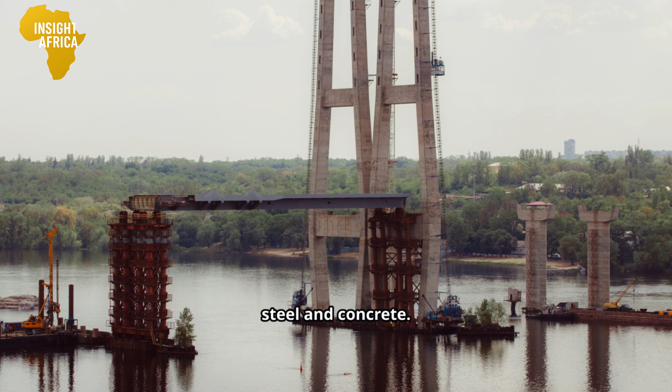This is not a story about charity. It is a chronicle of will, a testament to a nation that looked at the vast, shimmering expanse of Lake Victoria and saw not an obstacle, but an opportunity—an opportunity to connect its people, to fuel its economy, and to declare its independence in a language the world could not ignore: the language of steel and concrete. This is the story of a bridge, but it is also the story of a dream forged in the heart of Africa, for the people of Africa, by the people of Africa.

Imagine a sunrise. The first light of dawn spills across the horizon, painting the sky in hues of orange and gold. Below, the second largest freshwater lake on the planet sleeps, its surface a mirror reflecting the heavens. And stretching across this immense body of water, a new silhouette cuts through the morning mist. It is a structure of immense scale and profound significance.

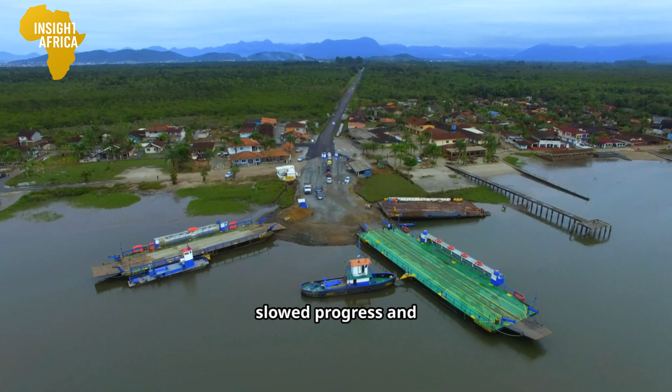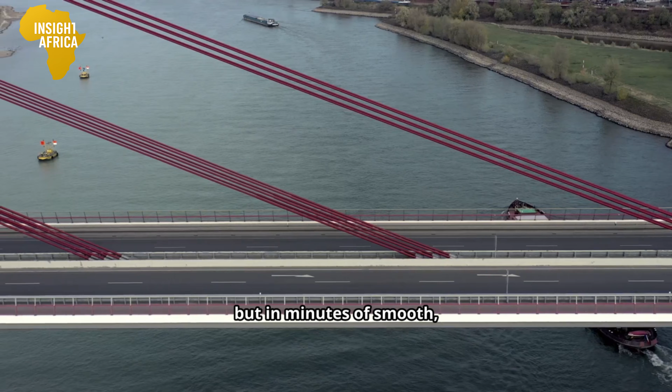For decades, the crossing was a challenge, a bottleneck that slowed progress and separated communities. Ferries, old and unreliable, were the only link. But a new era was dawning, one where the journey would be measured not in hours of waiting, but in minutes of smooth, uninterrupted travel, a testament to a nation's resolve.

This is the Lake Victoria Bridge. More than just an engineering marvel, it is a symbol. It represents a fundamental shift in the narrative of African development, framed by external forces: conditions of international lenders, the agendas of foreign powers, the narratives of dependency.

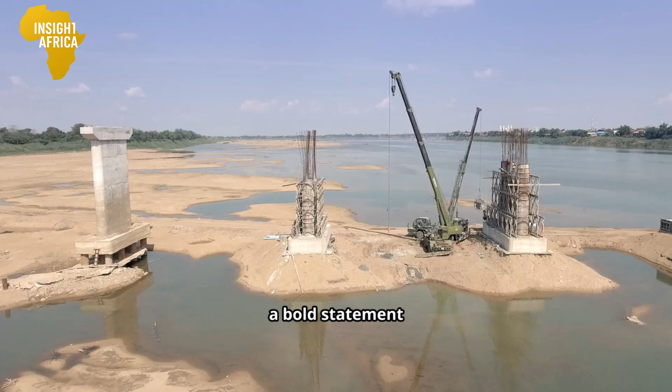Tanzania chose a different path. It looked inward, not outward. It gathered its own resources, marshaled its own expertise, and trusted in its own vision. The result is a structure that stands not as a monument to foreign aid, but as a towering declaration of self-reliance, a bold statement that the future of Africa will be built by African hands.

The world was watching, but perhaps it wasn't paying close enough attention. The financial gatekeepers, the institutions that have long dictated the terms of progress in the global south, were bypassed—the International Monetary Fund, the World Bank. This project was born from the collective will of the Tanzanian people, funded by their own treasury.

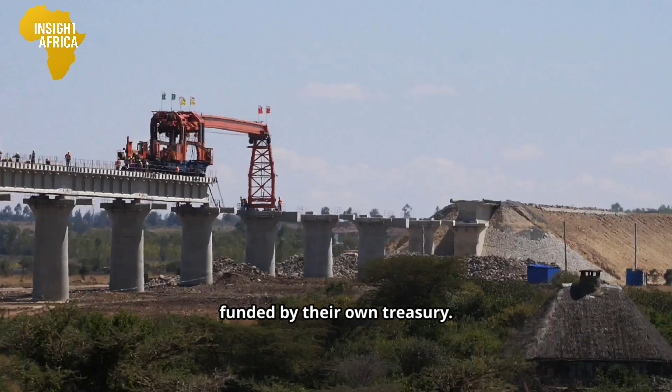It was a quiet revolution, a bold act of economic sovereignty that sent ripples through the halls of global finance. It proved that a nation, armed with vision and discipline, could achieve the monumental without begging for permission, rewriting the rules of what was considered possible for an African nation to accomplish on its own terms.

In the lexicon of global development, certain words are repeated like a mantra: debt, aid, dependency, conditions. These are the chains, both visible and invisible, that have often shackled the ambitions of nations striving for true independence. The story of the Lake Victoria Bridge is the story of breaking those chains. It is an unapologetic display of a country taking control of its own destiny.

When the decision was made to fund this colossal $300 million project entirely from domestic resources, it was more than a financial strategy. It was a political and philosophical statement. It was Tanzania announcing to the world that its future would not be mortgaged, its policies would not be dictated, and its progress would not be contingent on outside approval.

This project is a masterclass in Pan-African excellence, a beacon of what is possible when a nation harnesses its pride and channels it into progress.

The bridge is not just a physical connection between the city of Mwanza and its surrounding regions. It is a spiritual connection to the ideals of sovereignty and self-determination championed by the forefathers of African independence. It embodies the spirit of Julius Nyerere's Ujamaa, updated for the 21st century, a vision of familyhood and self-reliance, now expressed in the language of world-class infrastructure.

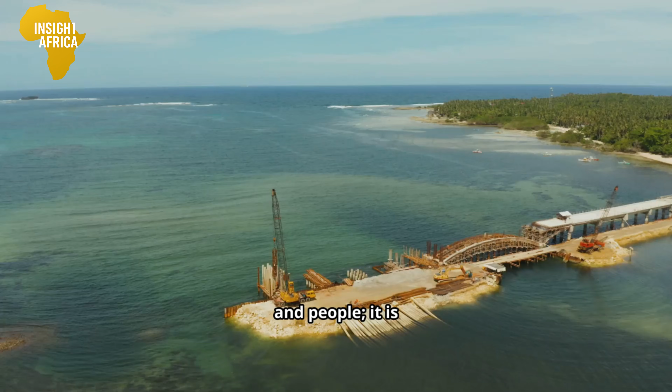This is not just about moving goods and people, it is about moving a nation forward, propelled by its own engine of ambition and pride.

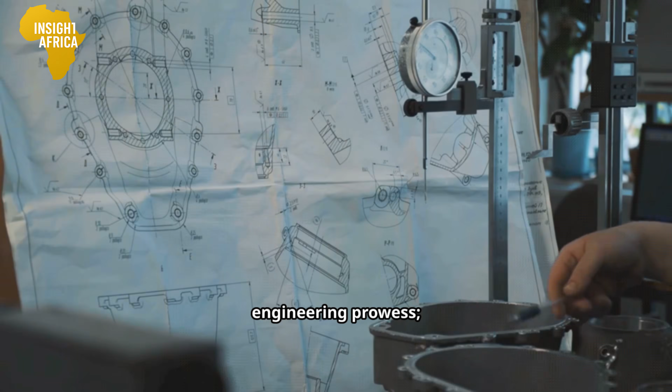Consider the sheer audacity of the vision, to look upon the vast expanse of Lake Victoria and decide not just to cross it, but to do so with a structure that would become the longest of its kind in East and Central Africa. This required more than just engineering prowess. It required a deep-seated belief in one's own capabilities.

It was a challenge to the prevailing narrative of African limitations, a direct refutation of the idea that mega-projects on this scale were the exclusive domain of wealthier, more developed nations. Tanzania dared to dream on a continental scale, and in doing so, laid down a blueprint for its neighbors to follow, a path paved with national pride and unwavering resolve.

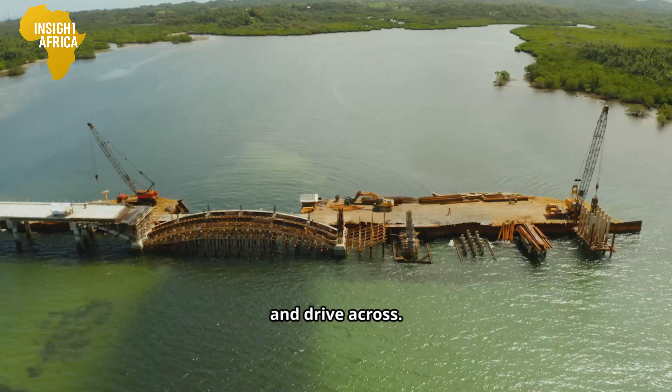The bridge stands as a physical manifestation of a new African consciousness. It is a symbol that resonates far beyond the borders of Tanzania, speaking to a continent on the rise. It is sovereignty you can see, touch, and drive across. Every girder, every pillar, every inch of asphalt is infused with the spirit of a people who chose to build their own future rather than wait for it to be given to them.

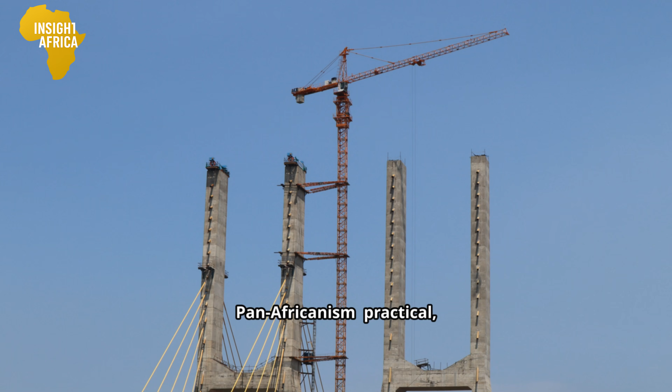This is the essence of the new Pan-Africanism: practical, bold, and utterly unapologetic. It is the understanding that true liberation is not merely political, but economic and psychological, and it is achieved one monumental, self-funded project at a time for all the world to see.

June 19th, 2025. This date is not just a mark on a calendar, it is etched into the soul of a nation. On this day, a river of humanity flows toward the shores of Lake Victoria. They come from every corner of Tanzania, from the bustling streets of Dar es Salaam to the quiet villages of the Serengeti. They are farmers, merchants, students, elders, their faces alight with a shared sense of anticipation.

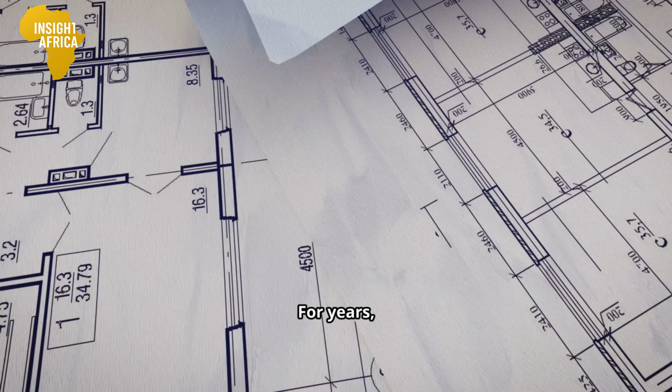The air crackles with an electric energy, a mixture of joy, pride, and disbelief. For years, the bridge was a distant promise whispered on the wind. Now it stands before them, a magnificent reality of steel and stone, a titan of progress gleaming under the African sun. This is more than a ceremony, it is a national pilgrimage.

Thousands upon thousands gather, a vibrant mosaic of color and celebration. The sound is a symphony, the rhythmic pulse of drums, the soaring melodies of triumphant songs, the constant joyful hum of voices sharing stories. Flags, brilliant green, yellow, black, blue, wave like a forest in the wind.

For so long, the lake was a divider, a vast expanse of water that dictated the pace of life and commerce. Today, it is the backdrop for a moment of ultimate connection, a celebration of a promise kept, a monumental task completed, a day when the impossible became tangible.

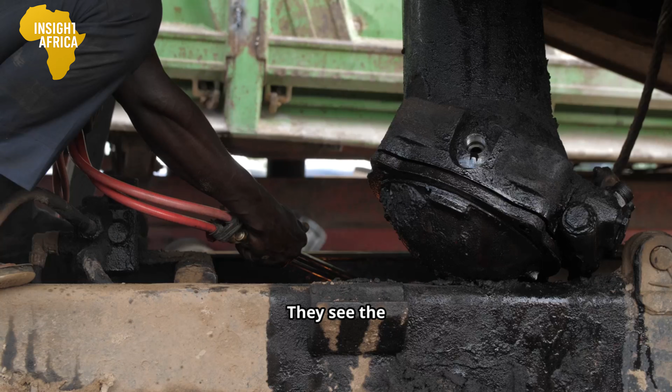They look up in awe at the colossal structure that now commands the horizon. It is a testament to years of tireless labor, a monument built not by foreign hands, but by their own brothers and sisters. They see the engineers who designed it, the welders who fused its steel heart, the construction workers who braved the elements day and night to bring this vision to life.

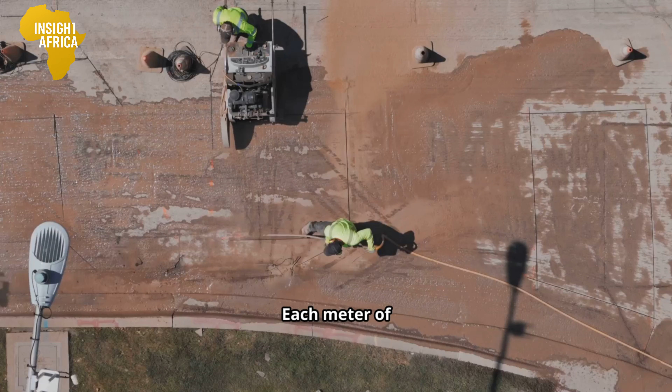Each pillar rising from the depths of the lake is a symbol of resilience. Each meter of asphalt is a paving stone on the road to a new era of prosperity. This is the moment when a nation collectively exhales, releasing the breath it has held, and inhales the sweet air of achievement.

The world's cameras are here, of course. International news crews, financial analysts, political observers have all descended upon Mwanza. They came expecting to report on a story of African infrastructure, but they found something far more profound. They found a story of sovereignty in action.

They witnessed a nation not just opening a bridge, but opening a new chapter in its history, written in its own language, funded by its own wealth, and dedicated to its own people. This was not just an inauguration, it was a coronation of a new kind of power, the power of self-belief.

As the official proceedings begin, a hush falls over the immense crowd. The moment is saturated with historical weight. You can feel it in the stillness of the air.

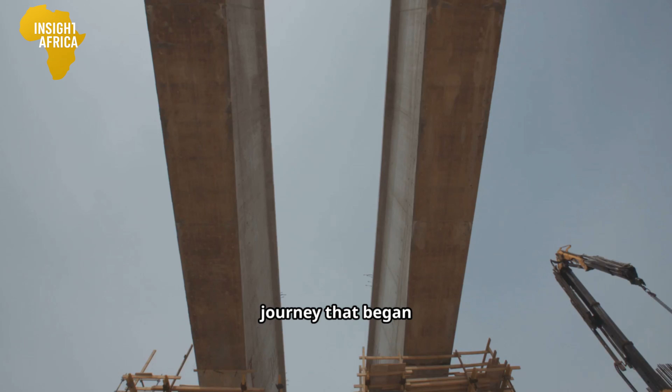This is the culmination of a journey that began not with the first pour of concrete, but with a decision made in the highest halls of power. A decision to trust in Tanzania itself. It was a gamble, a defiant choice to sidestep the well-trodden path of international loans and the conditions they inevitably carry. It was a declaration that the nation's destiny was its own to forge.

And as leaders speak, their words are not just for the cameras or the dignitaries. They are for every citizen who contributed, through their taxes and their faith, to this shared triumph.

The bridge is more than a link between two points of land. It is a bond that strengthens the very fabric of the nation. It connects the economic powerhouse of Mwanza, the rock city, to the vital agricultural lands and trade routes that lie beyond. But the connection is deeper than commerce.

It is a psychological bridge, uniting a people in a common sense of purpose and achievement. For generations, communities felt the distance imposed by the lake. Now, that distance has been conquered. A journey that once took hours of uncertainty by ferry is now a smooth, reliable passage of mere minutes, woven into the daily rhythm of life, a constant reminder of what they built together.

Imagine the first vehicles to officially cross. Not a motorcade of politicians, but a convoy representing the lifeblood of the nation. A bus filled with schoolchildren, their faces pressed against the windows. A truck laden with fresh produce. An ambulance, representing the promise of faster access to healthcare. Each vehicle is a story, a testament to the bridge's immediate and profound impact on the lives of ordinary Tanzanians, a rolling tribute to their collective effort.

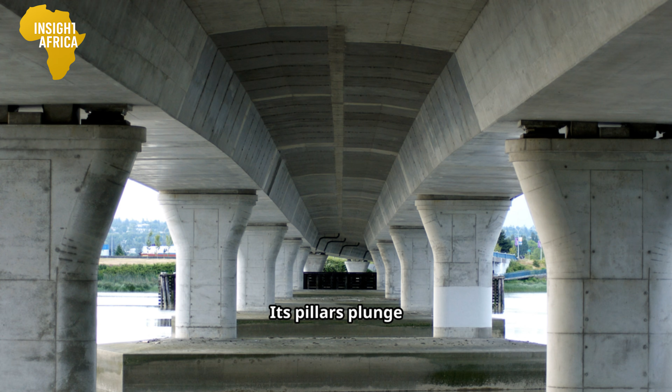Think of that distance. For 3,200 meters, this titan strides across the water. Its pillars plunge deep into the lakebed. Its deck soars high above the waves. A colossal artery designed to carry the lifeblood of a nation.

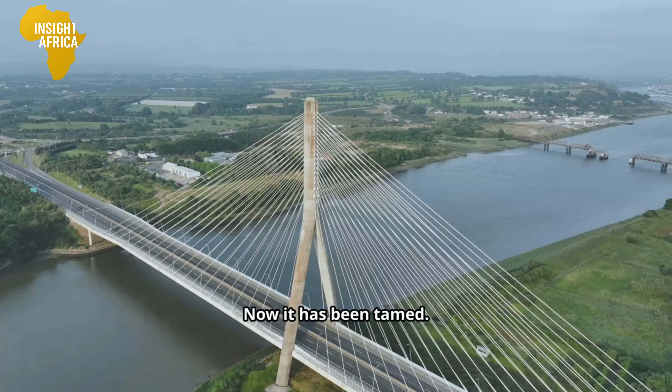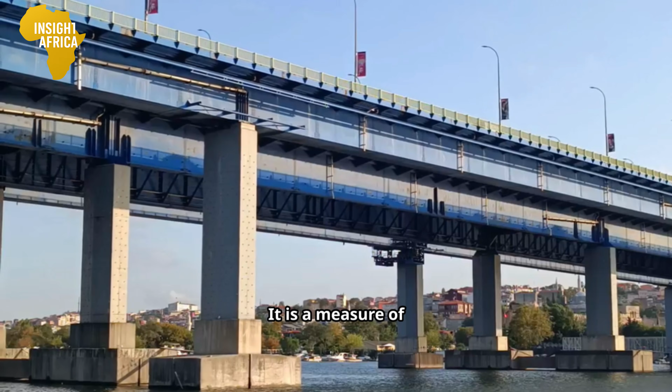Before it existed, this expanse was a formidable barrier. Now it has been tamed, not by an outside power, but by the sheer will and ingenuity of Tanzanian minds and hands. This structure is a physical manifestation of national ambition, a line drawn across the map that redefines connectivity. Its length is not just a statistic, it is a measure of newfound confidence, a symbol of the capacity to think big and to build even bigger.

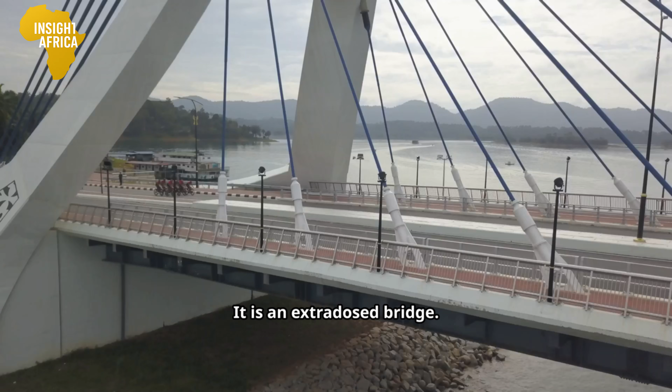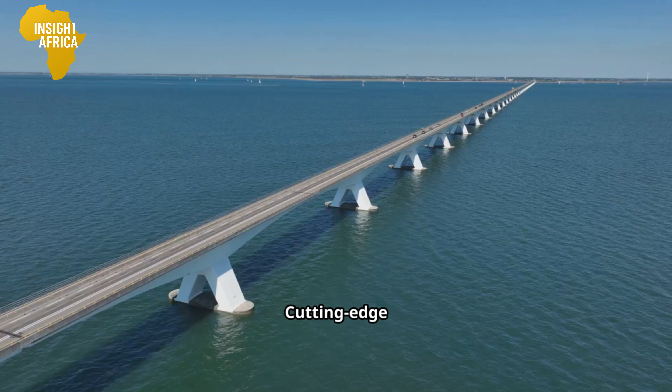The design is a marvel of modern engineering, a fusion of strength and grace. It is an extradosed bridge, a sophisticated hybrid that combines the principles of a girder bridge with the elegance of a cable-stayed design. The choice was deliberate. Cutting-edge technology that ensures aesthetic beauty, long-term durability, built to withstand the lake's unique conditions for a century or more.

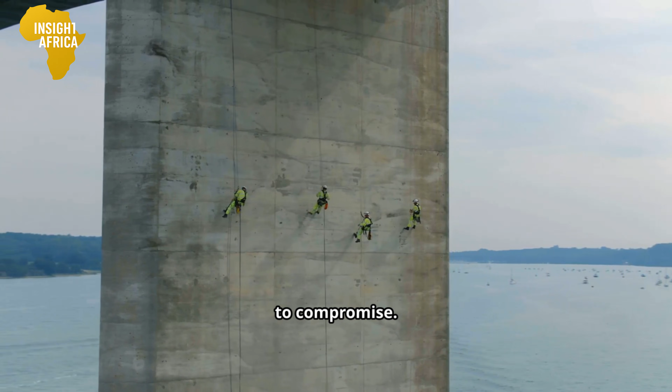Every cable, every segment of pre-stressed concrete, speaks to technical excellence rivaling projects across the globe. This is not just infrastructure, it is artistry on a monumental scale, a testament to a commitment to quality that refuses to compromise. This is the new titan of the African continent.

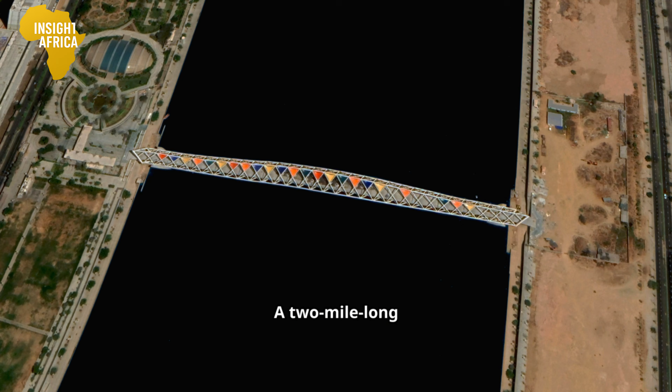Its shadow falls long across the water, a constant, powerful reminder of the day Tanzania solved its own problems with its own vision. It stands as a silent rebuke to the quiet condescension of the old world order, a 2-mile-long rebuttal to any narrative of limitation.

A landmark for Tanzania, for all of Africa. A beacon proving that when it comes to building the future, the continent's ambition knows no bounds. Its reach extends as far as its vision dares.

The significance of the bridge extends far beyond its record-breaking length. It is a strategic masterpiece, a lifeline meticulously planned to unlock the economic potential of an entire region. For decades, Mwanza, a critical hub on the southern shore of Lake Victoria, was functionally an island. Ground transport to the north was effectively severed. The only options were slow, often unreliable ferries, or a punishing circuitous road journey that added hundreds of kilometers and countless hours.

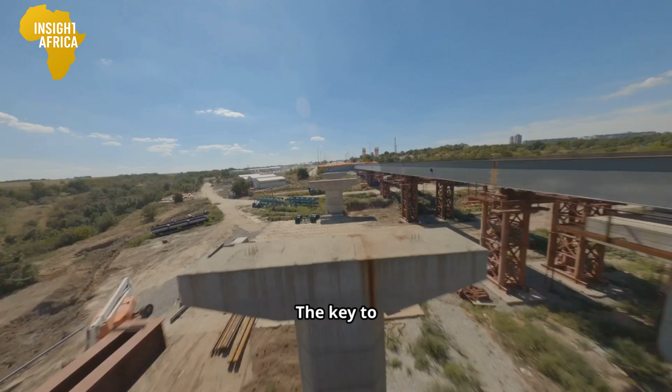The bottleneck choked commerce. It stifled growth. It isolated communities. The bridge was not just a convenience, it was a strategic necessity. The key to unleashing a torrent of economic activity held back for generations. This structure is the heart of a new circulatory system.

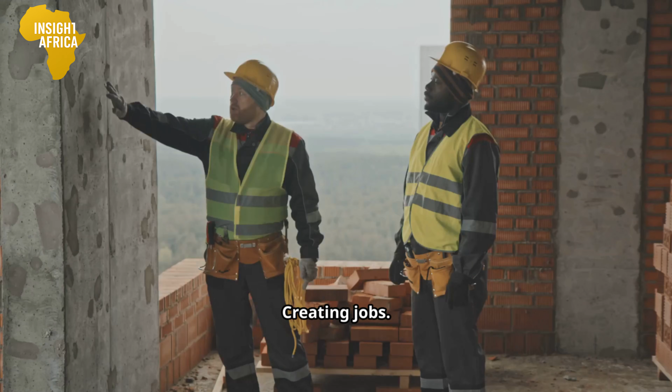It connects Mwanza directly to neighboring regions, Geita, Kagera, and to landlocked nations, Rwanda, Burundi, Uganda. Suddenly, goods flow in a smooth, uninterrupted stream. Farmers in fertile northern lands can get produce to Mwanza markets in a fraction of the time, reducing spoilage, increasing profits. Minerals from resource-rich Geita move more efficiently, fueling the national economy. This isn't just about moving trucks faster, it's about accelerating progress for millions, creating jobs, building prosperity from the ground up.

Imagine the daily dance of commerce across its 2-mile span. Trucks laden with cotton, trucks laden with coffee, once delayed at ferries, now glide toward ports and processing plants. Buses carrying traders, buses carrying workers, connecting urban centers with rural communities, fostering integration and opportunity.

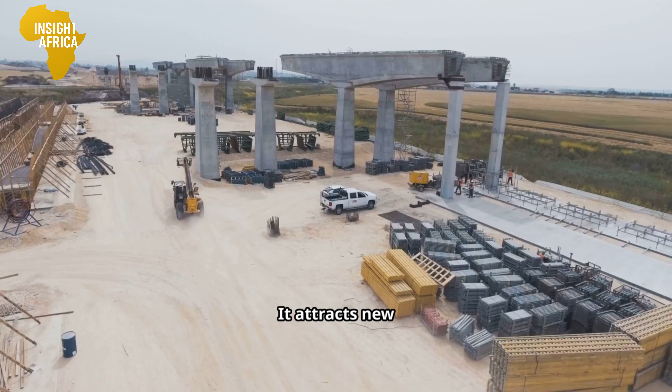The bridge is a powerful economic engine. Its constant hum is the sound of a region awakening. It reduces transportation costs, it increases trade efficiency, it attracts new investment to previously remote areas, a catalyst for a chain reaction of development. Every vehicle contributes to a stronger, more resilient national economy.

More than an engineering feat, it's a tool of empowerment. It empowers the farmer, the miner, the small business owner, the student. It gives them back the most precious resource: time. Hours once lost to waiting are now hours for production, for education, for family.

In building this bridge, Tanzania did more than join two pieces of land. It connected its people to opportunity. It bridged the gap between potential and reality. This 3.2-kilometer structure is a testament: true development isn't measured in dollars loaned, it's measured in lives transformed by sovereign ambition.

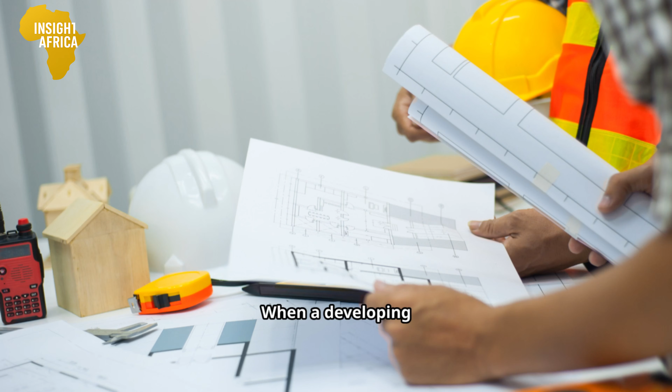In the grand theater of global finance, there is a script that has been followed for decades. When a developing nation dreams of a project this grand, this audacious, the first act always begins with a pilgrimage, a journey cap in hand to the grand halls of the World Bank, to the International Monetary Fund in Washington, D.C. It is a well-trodden path, paved with loan applications, structural adjustment policies, conditionalities that often reach deep into the sovereign affairs of a nation. This is the established order.

But Tanzania, with a quiet and steely resolve, chose to tear up that script. They decided the first act would not be a plea for help, but a declaration of self-reliance. When plans for the Lake Victoria Bridge were finalized, the world's financial institutions waited for the inevitable phone call. The call never came. Instead, Tanzania announced it would finance the entire $300 million cost internally, paid for by the Tanzanian people, through their own national treasury, from their own revenues.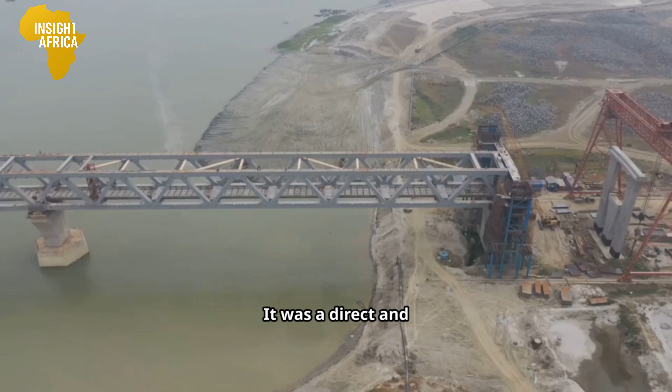This was not just a funding decision, it was a political earthquake. It was a direct and unapologetic challenge to the decades-old paradigm that Africa's progress must be underwritten by foreign capital and subject to foreign oversight. This singular act of financial sovereignty cannot be overstated.

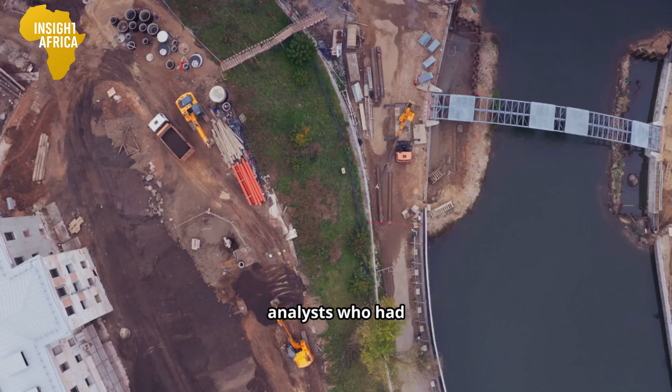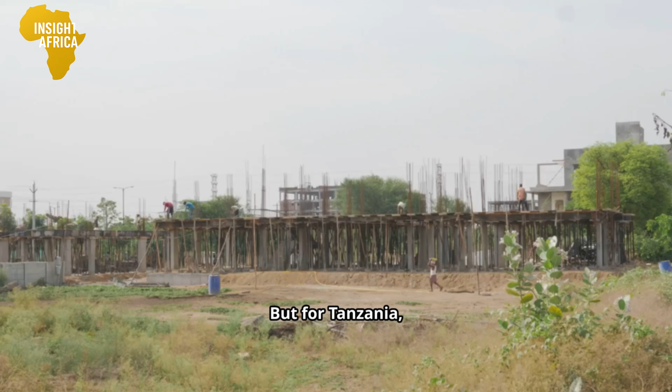It was a move that baffled the so-called experts and financial analysts who had long preached the gospel of foreign direct investment and international loans as the only viable path to large-scale infrastructure. They viewed it as a gamble, a risky deviation from the norm. But for Tanzania, it was the only path that guaranteed true ownership.

By rejecting the familiar embrace of international lenders, the nation was consciously refusing the strings that always come attached: policy prescriptions, austerity measures, and the subtle erosion of economic independence that often follow in the wake of such massive debts. The message was clear and resonant: Tanzania's future would not be built on borrowed money. It would be built on the bedrock of its own economic discipline and the collective will of its people.

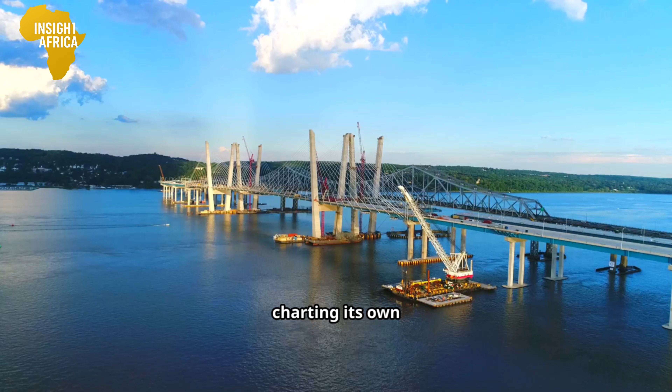This decision was a powerful statement about the health of the nation's economy and the confidence of its leadership. It demonstrated a capacity for long-term planning and fiscal management that many external observers had failed to recognize. In one bold move, Tanzania shifted its status from a supplicant in the global financial system to a sovereign actor, charting its own course and building its own monuments with its own hands and its own wealth.

As we conclude this story, we stand at a threshold. The Lake Victoria Bridge is not the end of the narrative, but a powerful and inspiring prologue to a future still being written. The ink is now in African hands. The success of this project has unleashed a torrent of ambition, a contagion of courage spreading across the continent.

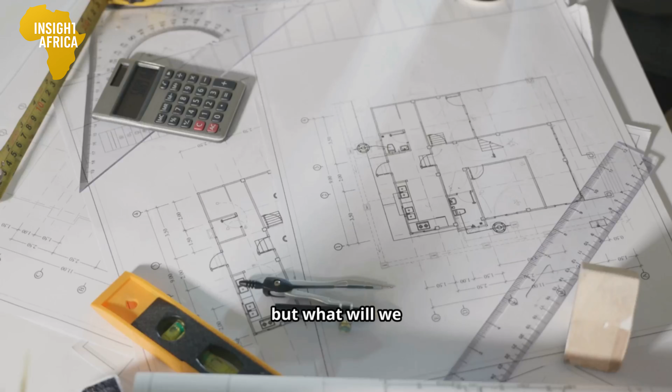The question it poses to every African is not what has been built, but what will we build next? The bridge has raised the bar, expanded the horizon, redefined what is possible. The future is an open page, waiting for new monuments, new innovations, new declarations of sovereign power.

This is the dawn of the African century, not defined by resources extracted, but by the genius and resilience of its people. The path forward is integration, collaboration, shared ambition, high-speed trains connecting our capitals, unified energy grids powering industry, a single continental market driving prosperity.

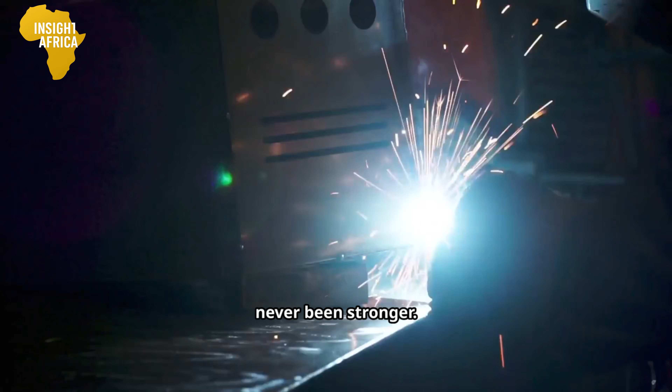The challenges remain immense, but the will to overcome them has never been stronger. The spirit that built the Lake Victoria Bridge is the same spirit that will build this new, interconnected and powerful Africa. They said Africa must wait for permission. Tanzania said no. This is Insight Africa, where sovereignty builds its own future.